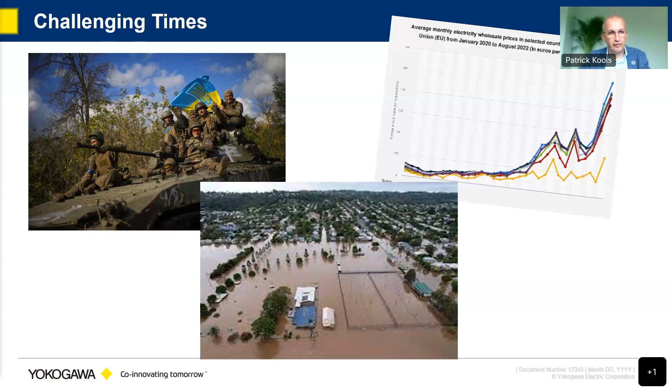I think these three events are a good reflection of what the World Energy Council calls the energy trilemma. It says that when looking at energy, there are really three issues that need to be kept in balance. One is environmental sustainability - how is our energy system impacting our environment? But we're also looking at energy security - can we maintain access to the energy we need to run our society?

But also energy equity. It's interesting - here in the Netherlands it wasn't always such a big thing, but we're now really seeing that there are many people not getting affordable energy. And if you take that wider and look at the planet, there are still many, many people who do not have access to the power system or to reliable energy. So that's a big issue we need to solve together.

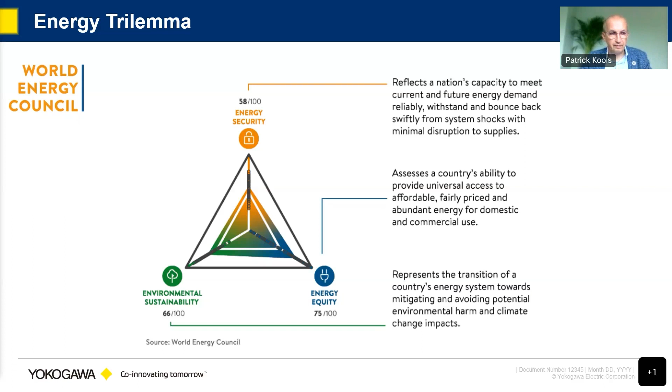The concern is that if CO2 emissions keep going and the average temperature of our planet rises, these systems may well be disturbed in such a way that we reach a point of no return. And once one of these systems starts changing, it also starts affecting other systems - so once the Arctic sea ice gets below a certain level, it might affect the boreal forest in the north of Russia, and that might affect other areas as well.

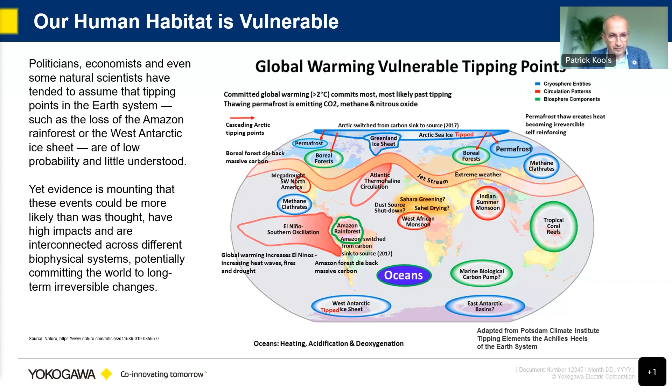So there is a lot happening in the environment also. We really have a big challenge there as a society.

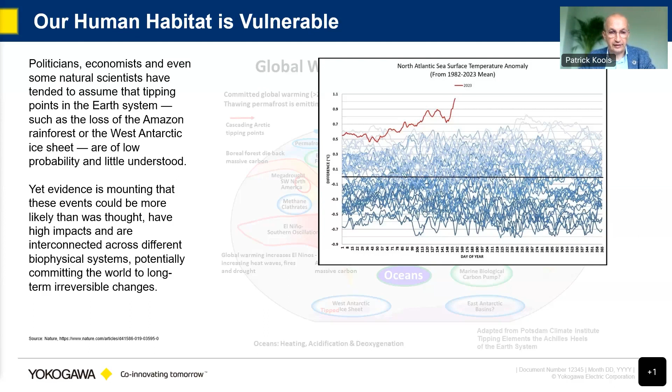Taking this a little bit further - you might think, if you follow the news, especially in Europe, that we're already doing so much about the environment and there's a lot of projects starting up. But really, this is no time to rest, because if you look over the past 20 years, we see that carbon intensity - the emissions of carbon in the world - have actually declined quite slowly. In 2021, they only declined by 0.5%.

And to be honest, to limit global warming to 1.5 degrees, we need to achieve a 77% reduction in carbon intensity by the end of this decade. So that's by the end of 2030. Yeah, and that's 6.5 years from now. And this means that we need to decarbonize by 15.2% per year. And that is 11 times faster than the global average achieved over the past 2 decades.

So if you think, hey, over the last 5 to 10 years, I've been hearing a lot about decarbonization, and I'm about done with it, I want to do something else. The news is we need to speed up. And I think the good news is that over these past 10 years, a lot of preparations have been made. And I think a lot of resources are now being focused in this direction. And that is something I want to talk about briefly as well.

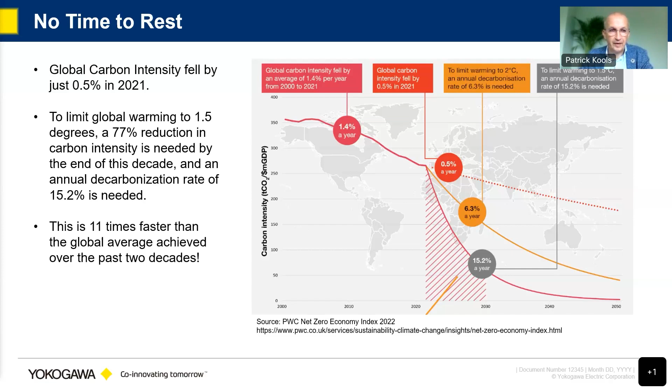Because what we see in Europe is that also as a response to the situation in Ukraine, there's been a large focus on energy security, and specifically cutting Europe's dependency on Russian gas. And at the same time, we already had a program in place called Fit for 55, which was focused on reducing our CO2 emissions by 55%. And these programs are really coming together now.

So there is a huge focus from the European Union on renewables, putting more rooftop solar, decarbonizing industry, speeding up the permitting for renewable energy as well. And within that, and that is the topic that we're talking about more today, there's also been a very strong focus on hydrogen. There was already an ambitious target. I'll get back to that in a second. But as a result of the Ukrainian situation, that target that was already extremely ambitious has been doubled. So we have a lot of work ahead of us.

Just let me grab a sip of water for a second. All right, thank you very much.

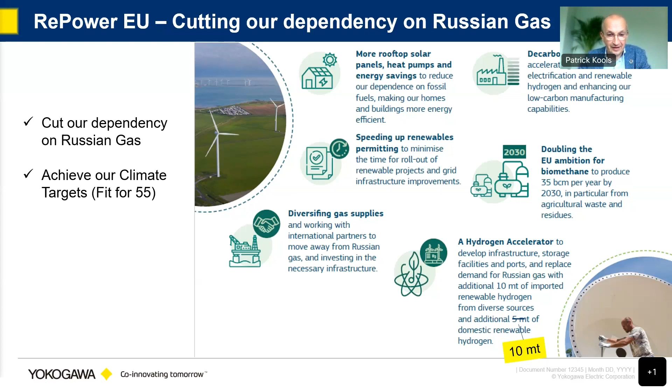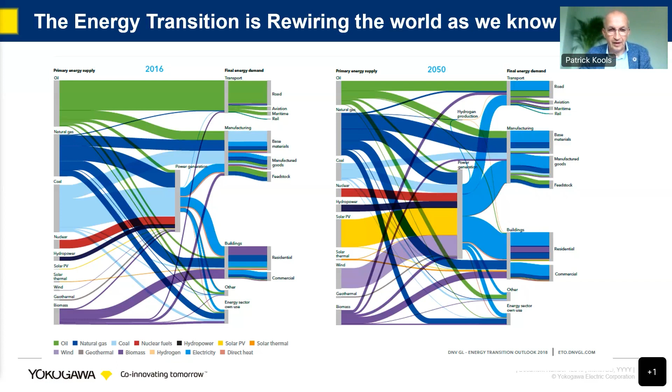But if we zoom in on this, things get bigger again. Hydrogen in itself is not a new thing. Already at this moment in the world, there is a lot of hydrogen being produced, and it's actually non-decarbonized hydrogen, usually produced from steam methane reforming. And the current use of hydrogen is mainly as a feedstock for refineries, for example. The current production of hydrogen is actually one of the bigger emitters in the world.

Yeah, at the moment, the production of hydrogen emits about, in 2018, 830 megatons of CO2 every year. And that's 2.2% of global emissions. And yesterday I learned that's actually about equivalent to the emissions caused by our container shipping industry, which does about 3%.

So at this moment in time, although hydrogen is being seen as a way out, a green solution in the energy transition, much of the production of hydrogen actually contributes to the CO2 emissions. So we have a problem to solve in the hydrogen production itself, and then we also need to make a shift to alternative use of hydrogen.

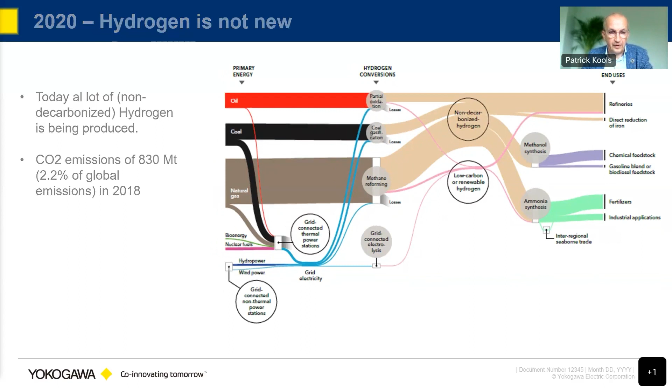So there's a shift in the production of hydrogen, there's a shift in the volume of hydrogen, but there's also a shift in the applications of hydrogen. So we're looking to decarbonize the current hydrogen delivery, but we're also seeing whether we can use hydrogen as an energy carrier, and also as a feedstock for chemical processes, and also, and this is a big focus here in the Netherlands at the moment with Tata Steel, whether we can use hydrogen to clean up the production of steel through the DRI, the direct reduced iron process. And that is a big challenge at this moment in time.

Let me just take one more sip of water.

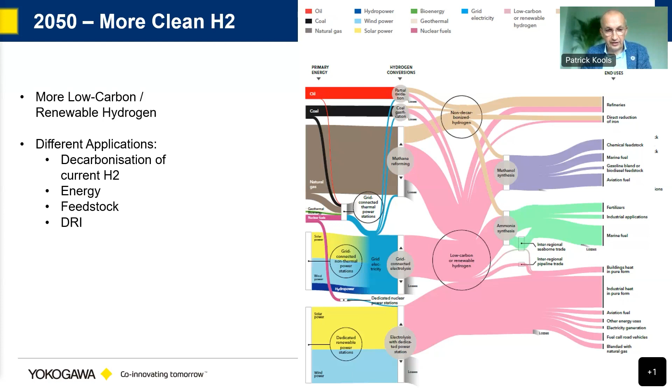Alrighty, so many shifts happening at the same time. Moving away from non-decarbonized hydrogen to decarbonized hydrogen, moving to larger volumes of hydrogen, and moving in the direction of different uses of hydrogen, for energy, for feedstock, and for specific industrial applications as well. So if you add all that together and see what the challenge is in the hydrogen space, you can see that there are huge ambitions in terms of ramping up the production volume of hydrogen.

I was actually looking for a good graph of the updated REPowerEU volumes, because remember, those doubled, but I found a graph that represented the initial Fit for 55 target, which was producing 5.6 million tons of clean hydrogen in 2030. That target has now been increased to 20 megatons of production of clean hydrogen, of which 10 megatons needs to be produced in Europe alone.

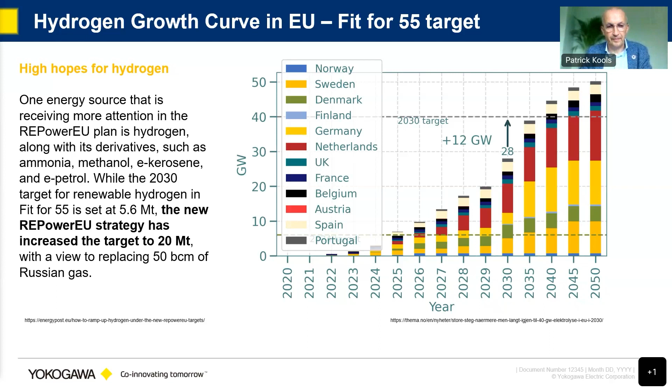And if you put that on a graph, you see that the installed capacity we need to create for clean hydrogen is more than 100 gigawatts of clean hydrogen production. In my mind, that's 100 gigawatts of green electrolyzers producing about 10 million tons of clean hydrogen in 2030. Imagine that, that's in 6 years' time.

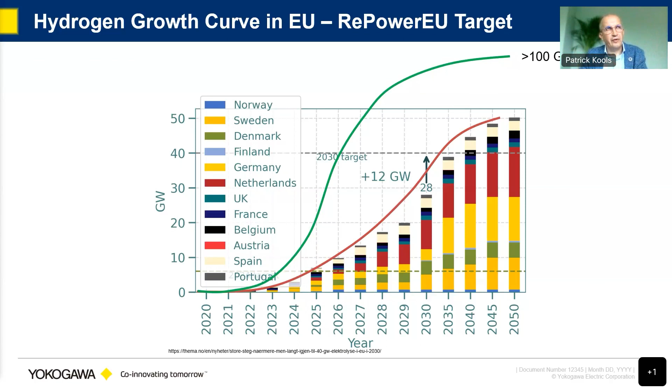And really feel into that number, because if you think we're already doing a lot, at this moment in time in Europe, 20 megawatts is the biggest installation, in Spain, that's up and running. So we have 20 megawatts up and running, and the ambition for green hydrogen production in Europe is 100 gigawatts. That is 5,000 times the current installed production volume.

And if we look in the Netherlands, for example, I made it very small here, but the ambition by 2030 is to have 8 gigawatts up and running. And again, in Europe, we have 20 megawatts actually producing at this moment in time. And to be honest, it's not even producing full time because it's connected to a solar grid, so it's producing a number of sun hours. It's in Spain. I've been thinking about this for the last couple of weeks. The numbers really are mind-boggling.

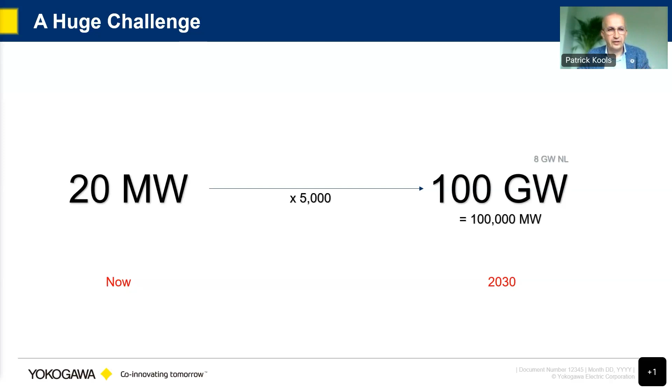So if there are any colleagues here from the digital automation side, or clients that are thinking about joining the hydrogen space and thinking there's not going to be enough work for the coming decade, look at these numbers. It's huge. The challenge is very big. And I keep thinking, how are we going to do this in a good way together and learn quickly?

Now, the commitment of the European Union and also of the financial industry to enabling this transition is also huge. So in terms of money, 503 billion has actually been reserved for climate and environmental investments. And if you look at the RePower plan, there's an additional investment of 210 billion for phasing out Russian fuel imports. But if you look at hydrogen specifically, there's been a reservation made of 5.2 billion via the IPCEI program to kickstart the hydrogen development.

And if I look at the Netherlands specifically, there was about $1.5 billion that was taken out of this IPCEI fund, and that was actually funneled into several hydrogen developments. And the biggest one here, which is about 700 million, was recently awarded to 7 of the larger hydrogen projects that have either taken FID, like the Holland hydrogen project, or are about to take FID, like the HyCC projects and a few other ones.

So what I have been seeing is that although we don't see many projects coming onto the market yet, a lot of groundwork has been done and a lot of energy is being channeled in the direction of making this happen. And just to add to that, on this last slide about what is happening in Europe, just this week the European Council has agreed on an update to the Renewable Energy Directive, and that is going to set binding targets for reducing emissions also for industry.

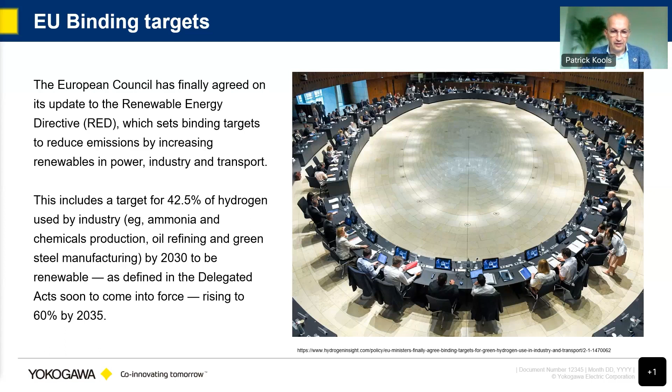So will the hydrogen economy break through? Will this whole process happen? It's still exciting, and we're waiting for the projects to come up, but there are a lot of factors going in that direction at this moment in time. Okay, so what's the role of digital in all of this, you might say? How does a party like Yokogawa or someone else play a role in this? And this is not just Yokogawa, this is all of us.

To explain that, I want to make a little sidestep into how Yokogawa is looking at this total energy system. I'm going to show you a picture which is wild, but it comes from a white paper that I recommend you download from our site. We call it the energy mandala. It shows how Yokogawa looks at how the whole energy system is developing as a whole. And what we are beginning to see, we call that energy systems convergence, is that we are moving towards an energy system that's going to have endless supply. If we install enough solar panels and wind farms, and it's inevitable, we're going to be producing a lot of energy on the supply side.

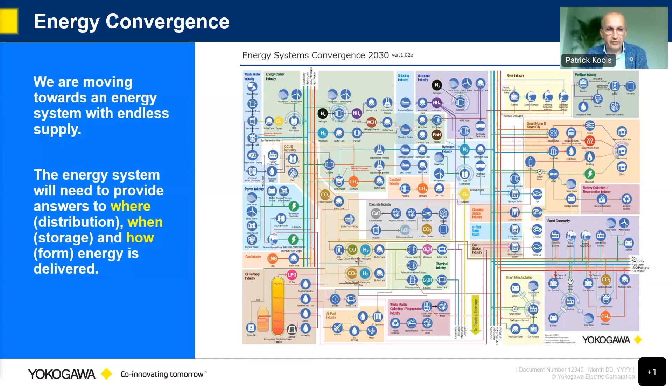So the role of the energy system is going to change in that it will need to provide answers to how we can distribute that energy that might be produced centrally somewhere, how we can store it to make sure it's available at the right time, and how we can transform it to make sure this energy is available in the right form. Because not everybody can use electricity for all their processes, and hydrogen is not applicable for everything either. So the energy system is going to be about distribution, storage, and conversion of energy.

And what we also see happening is that in the old days, we had a linear system with a lot of oil and big refineries, and then it all moved downstream. But we're beginning to see that the plants are getting smaller. They're getting more distributed. We see all our clients planning for multiple plants all over Europe.

We also see that there's going to be a blurring of the lines between industry and society. We see smaller plants being closer to site, local production of solar energy and wind energy. So the whole system is becoming more interdependent and much more connected.

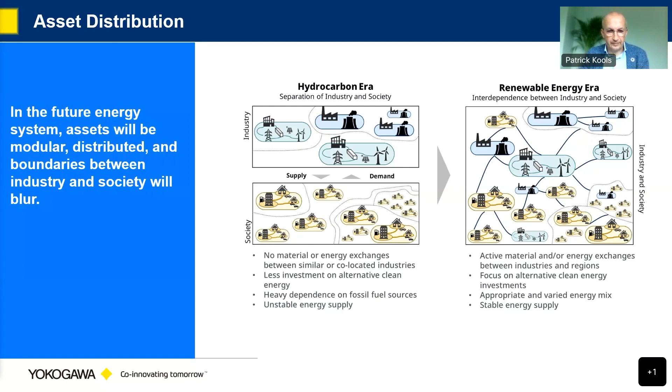What we are also seeing is that although we live in a world where companies are usually very focused on optimizing their own plant and applying all sorts of technologies to that, they're reaching the limits of that. Increasingly, customers are approaching us to discuss how they can integrate with neighboring plants and companies, sharing information and operating together so they can get more efficient and reduce their CO2 consumption together.

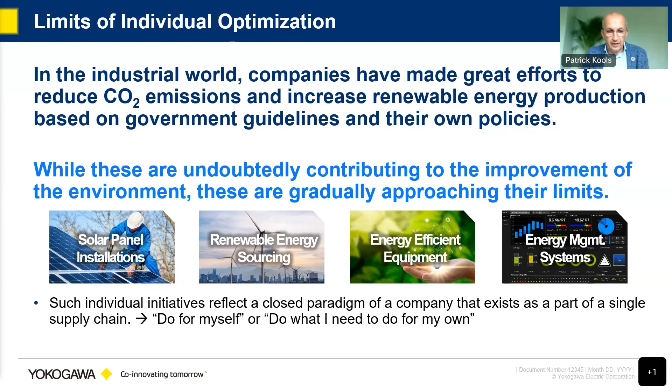The way Yokogawa looks at how we can accelerate and bring ourselves to a decarbonized society is that we believe, and this is where digital plays a big role, we can help with the optimization of individual factories, making them run very effective and efficient. But we can also help by connecting different plants and companies together, helping them balance their energy uses, CO2 uses, and material uses together, creating a circular economy and reaching a higher level of efficiency.

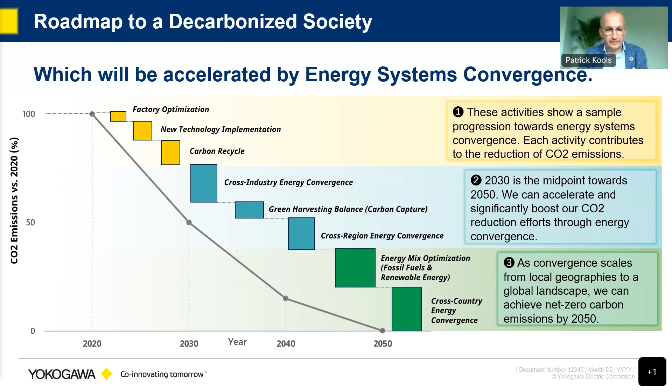So the direction we see things going is that we are going to see more and more smart factories that can operate very efficiently, effectively, and safely by themselves. And we see more interconnected ecosystems where these different factories are connected together, sharing materials, optimizing energy together, and reducing their emissions over time.

We call this a system of systems world, whereby everything is going to be interconnected in quite complicated ways. No longer just linear supply chains, but plants connected together, sharing information and resources, achieving a level of efficiency and effectiveness that cannot be achieved by one single plant alone.

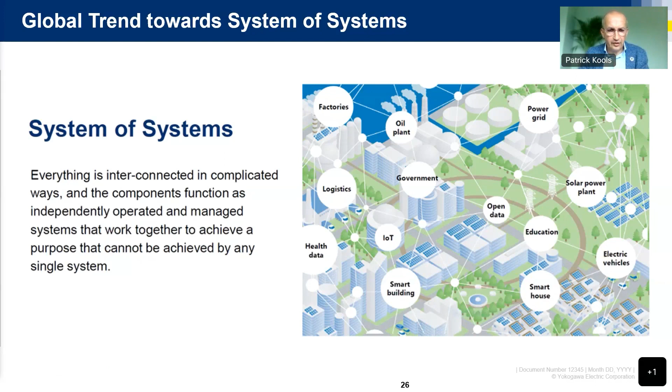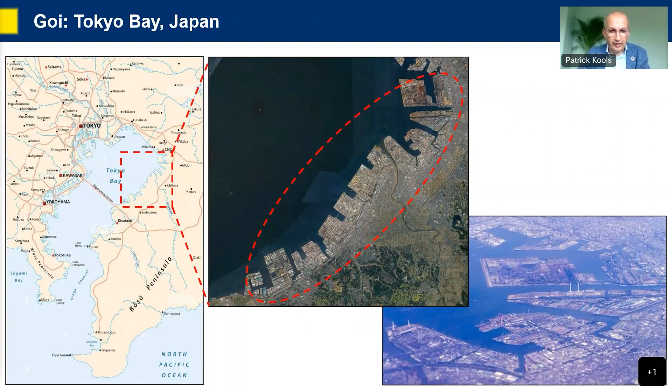I want to give you an example of a project we're doing right now. We call this the GOI project internally, and it's playing out in Tokyo Bay in Japan. This is a picture of the area. In this area, there are about 10 plants, ranging from a steel plant and refinery to a chemical plant and a quicklime plant.

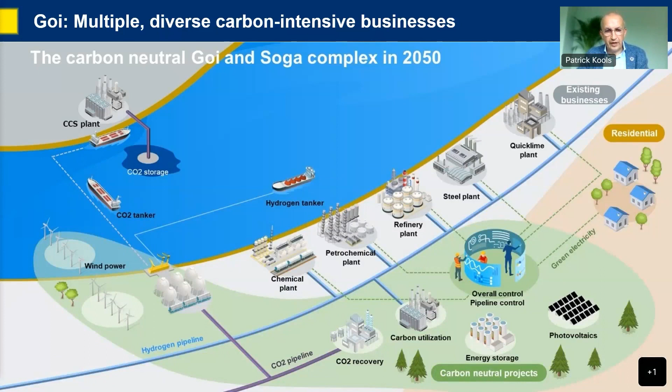They're also exploring the potential for CCS with CO2 storage. What Yokogawa is actually doing at this moment is working very actively together with all of these 10 plants, together with NEDO in Japan, a government institution. What we are exploring is what would happen if these 10 plants together would be able to start sharing information.

Sharing information about material usage, energy uses, CO2 usage, and all the other facilities and utilities they're using. What would actually happen if we share that data and start looking at the optimization potential between these 10 different plants? What would actually happen there?

What we are finding is that in the initial stage, just through the analysis, but now increasingly we are looking at how we can make this truly work. We are finding that we can really achieve significant benefits in energy consumption and also in CCU opportunities if we start integrating between these different companies and they start working more collaboratively together rather than just by themselves.

That leads to very interesting business models, because if you start collaborating like that, it might well be that a few plants start operating in a better way, while a few plants actually need to use their utilities more intensively, so their energy consumption goes up. But as a whole, they are able to reduce their energy consumption and CO2 emissions, and that, as a whole, benefits society. So we are exploring this project together with them, and it's a very exciting direction.

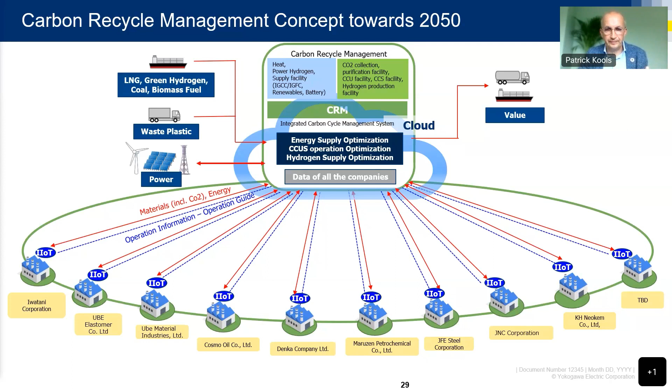Another way how we are applying this thinking is, for example, locally, the Holland Hydrogen Project. Yokogawa was very honored to be awarded the role as the main automation contractor for the Holland Hydrogen 1 project. This project is actually a 200 megawatt electrolysis-based hydrogen plant that's going to be built here in the Netherlands. At the moment, it's the largest hydrogen plant that's actually taken FID and in which we're doing work at this moment in time.

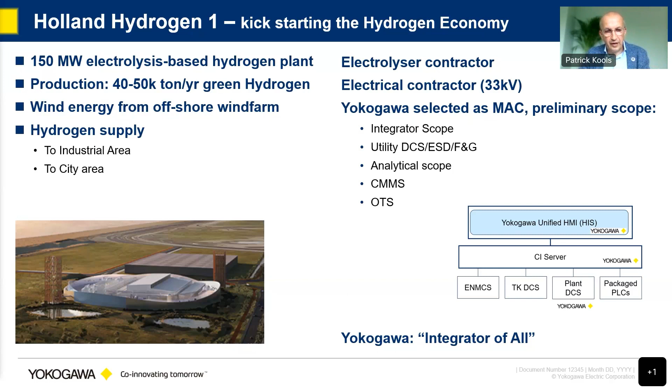Yokogawa was selected as the MAC, in which we play integrator for the whole package. But we're also applying the thinking I've been telling you about, because this plant will initially be designed for just one operator, running one operator in the control room and one in the field. But of course, the aim is also in the future to run this plant centrally controlled.

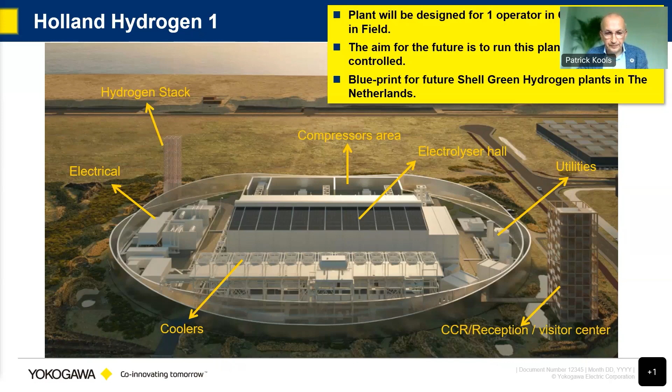There are going to be more Holland Hydrogens coming up, and we also see this as a blueprint for the future Shell green hydrogen plants. To be honest, we think this is also going to be a blueprint for many of the other hydrogen plants being developed by other companies in the world. Apart from having a strong focus on optimizing this plant inside the battery limits, we are also thinking very closely about how we can apply an open digital architecture that's still very secure, that allows us not just to do vertical and horizontal integration, but to make sure this plant is scalable and expandable, and that we can replicate it very easily.

Some core elements of our automation thinking here are to base everything on a central edge server that allows us to control the plant, but that also allows us to bring the data up out of the plant in a safe and secure manner, integrating it with the business, but also making that available for integration with, for example, the upstream wind farm that is feeding this plant and the downstream clients that are using the hydrogen, and maybe also the storage systems that are going to be developing around it.

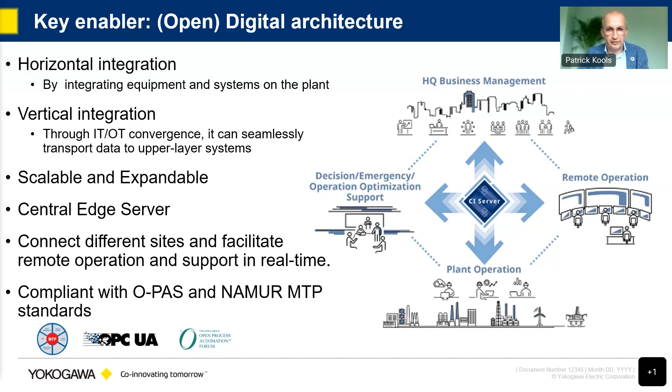A very important focus of our whole development here is that we are trying to base this as much as possible on open standards. This is a key message I would like to give: we are standing for a huge challenge together as an industry, and we are going to be rewiring the energy system in the world. I think we are challenged to apply as many open standards as we can, because we need to be able to share data between different plants, and we need to be able to optimize the whole energy system together.

So just focusing on the integration: horizontally, we are looking to enable collection of all process and operational data, supporting a variety of industry-standard open interfaces and communication protocols. We want to be able to integrate equipment, systems, and devices. This is important because, for example, we see different vendors on the electrolysis side and different vendors on the subsystems being developed for these plants. If we look at the number of plants that need to be built over the coming 6 to 8 years, I think all players are going to be needed. We cannot just standardize on one vendor alone, so all the vendors will play a role, but we need to make sure we can integrate all these packages together. Standards, again, are very important.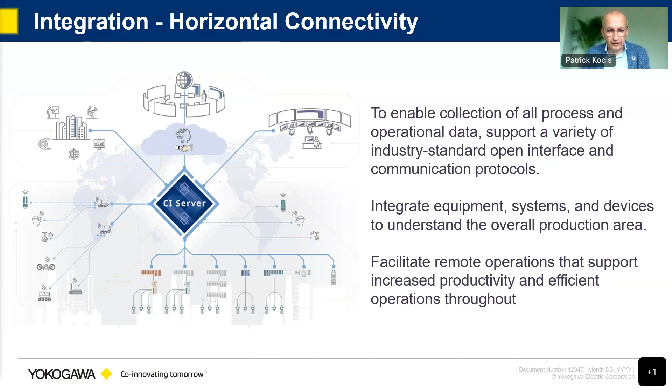And in terms of the vertical integration, we want to make sure that the data we get out of these plants is easily integrated into data lakes, and that we can use that for things like AI, machine learning, remote maintenance, asset optimization, etc.

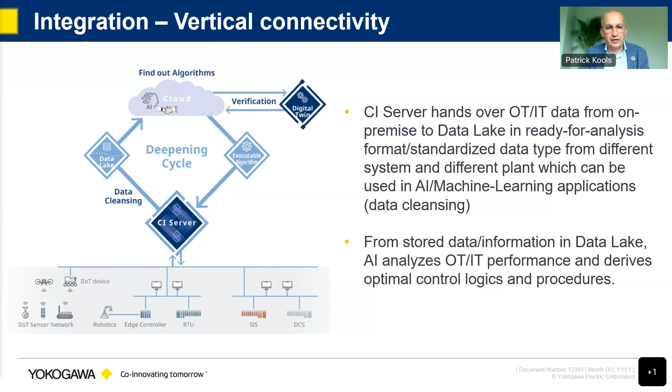Now, we are applying the same sort of thinking to the Yuri project, which is taking place in Australia at this moment in time. This is a project where renewable hydrogen is developed next to an ammonia plant, and we are applying the same sort of thinking to that renewable hydrogen plant, so as to also enable communication between the hydrogen plant and the ammonia plant in a very easy way, so that we can optimize across these two plants together.

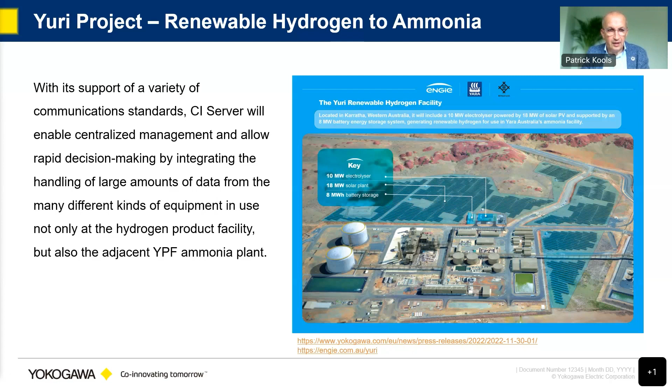So the message is, we are looking very much at vertical IT/OT integration within these plants, making sure that all the data from all the subsystems is collected in an open and easily accessible way, and that it can be made available in an industrial cloud for further integration.

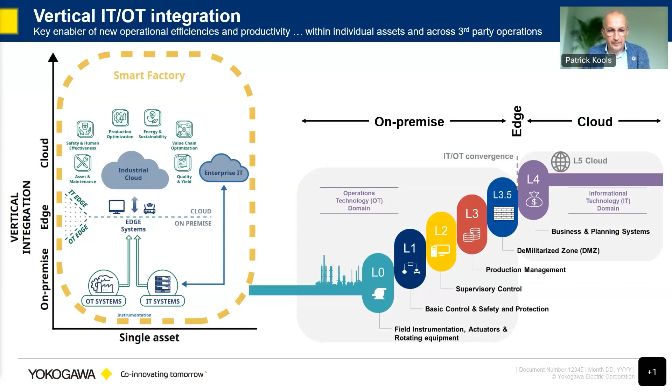And it's strongly our belief that if we work in that way, we enable all these plants to integrate together, to share data, and we enable optimization to be carried out across ecosystems of different plants. We believe this will not only lead to efficient, safe, and secure individual plants, but will also lead to a massive efficiency and productivity gain across ecosystems, across industrial clusters, across industrial activity.

I once said I believe it's going to be up to 20%. We can have a discussion about whether it's going to be more or less than that, but we believe that horizontal integration will bring a big benefit to society in the future.

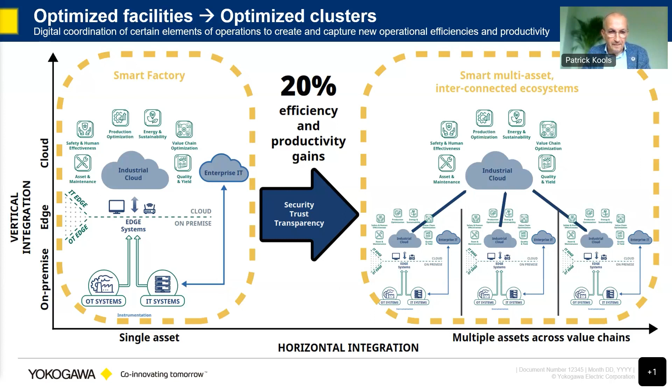Just to show that in a graph, as an example, this is a display that showed the production profile of an electrolyzer. If you look at an electrolyzer standalone supplying to an ammonia plant, you might want a flat production curve because that's the most efficient way of working.

But if you then look at the power costs, because you have renewable power coming in, you have a production and thereby cost profile of your electrical power coming into that plant, you might want to make a different decision. So you might want to run your plant in a more variable way in order to take advantage of the cost benefit of green power coming in.

So by having all that data available, and by having a view on the ammonia plant, on the storage that's available, on the production profiles of the green wind farm, you are then able to optimize the production profiles of the hydrogen plant itself, shown here in red, making use of storage and optimal use of the variable wind power while still meeting your supply commitments to the ammonia plant downstream.

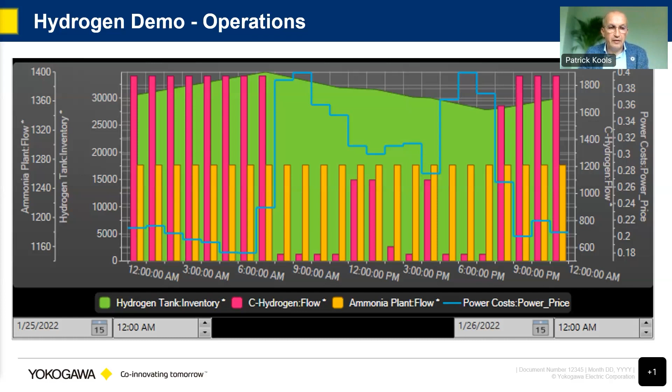And this is only in a small area. So this is one hydrogen plant with the ammonia plant, but the idea is enabling optimization across multiple plants, which may well be owned by multiple companies.

So that brings me to the end of my webinar. Again, we believe very strongly that we're moving into a new energy future, and we believe that energy future is going to be digital. And actually, we believe it's going to be digital first.

Because we think end customers need to start thinking not about, 'I'm going to build a plant, and oh, by the way, I need some digitization or process control on that,' but they should really start thinking about what is my business model, how does digital play a role in that, and how can I make sure that the assets I'm going to build can play an effective role in that digital business model. So the energy future will be digital, and it will be digital first.

And then here's my invite to all of you. I believe very strongly that if all the plans that are now lined up are going to work, we are not going to know what's going to hit us with all the work that's coming towards us in the coming decade. I think it's going to be huge.

Rather than just looking at our own part of the pie, let's work together and keep our eye on the prize. What we want to achieve is clean, secure energy for all. We need to scale fast, but we want to make sure that when we are ready in 10 years' time, we have an energy system with safe, secure, but interoperable assets that can work together and share data.